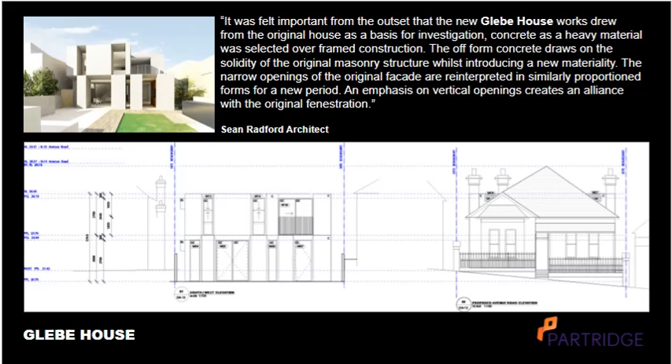The problem was that what he wanted was a checkerboard facade. And when we inquired about exactly what the checkerboard facade was, he wanted a single point of contact between all the concrete elements on the facade. No overlap, single point of contact. So he wanted something that was spectacular and an interesting use of concrete. So the first thing that an engineer does is try to persuade the architect to change his mind.

We all do it. It's worth a go. Needless to say, you sometimes have to go away afterwards and say, look, could we really make this work? Could we give it a go? What could we do?

So these were the images that they presented to us of what the house wanted to look like when it was finished. The architects are very creative in terms of what they produce. Engineers sometimes think that they're unrealistic. I would ask you not to prejudge, but let it run its course, check it out, run through all the options and see whether we can actually develop a system that can make these things work.

So a lot of off-form concrete. The finishes had to be crisp and clean, lots of square corners. So a really crisp finish for a back extension on a small house in Glebe.

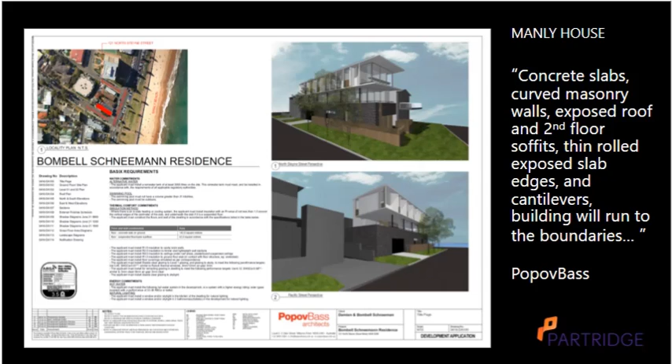Second phase in any design project is engagement. So after you've done your listening, you go away and you think about it.

So sometimes it requires this lateral thinking. What can we do? How can we solve the problem? Rather than just a very simple first principles look.

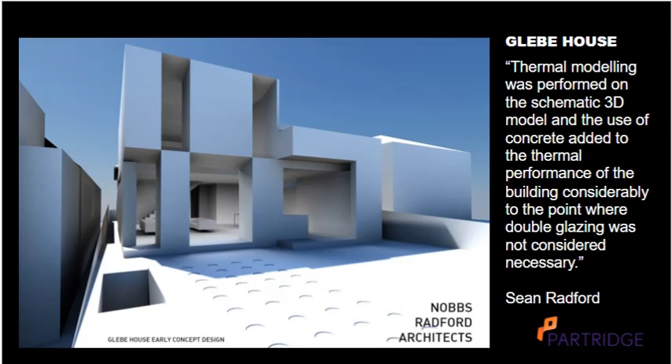One of the other investigations they did with this building was to do a thermal study, and they used the 3D models. And you can see on that, it clearly shows that single point of contact, how crisp they wanted those corners. And they discovered that they didn't need double glazing, which helped them a lot in their detailing and how they fitted their glazing into the concrete.

So, like I said, we went away and we gave them the obvious solutions. We said, why don't we have a nice big thick slab at the first floor? You'll see the edge of it in some cases, you won't in others. They didn't like that. We said, what about if we have a big thick slab at the roof and we hang everything from that? They weren't particularly happy with that either.

And what I need to point out is that behind that facade, for about two-thirds of its length, is a void. So there's not an awful lot of cantilever backspan and stuff that you can do with it.

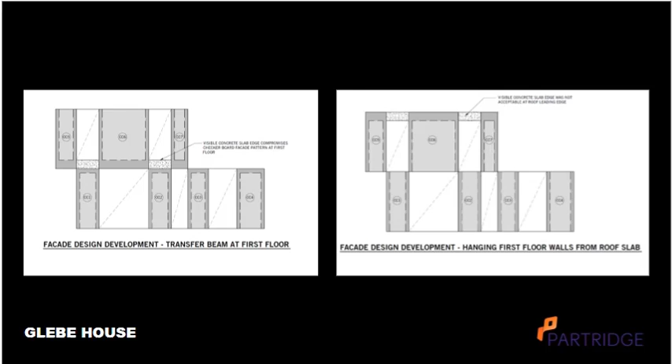So when we started to look at the design of this facade, it's actually a 3D facade because the columns have a certain depth. But visually from the outside, you want to see a 2D image. So the concept here then was the reversal of this. It was to turn a 3D structure into a 2D image.

On the Manly House, this is a bit of a demonstration of this whole engagement thing. This is this first stage of the architect sends you your drawings, you scribble all over them, you send them back. We now use Bluebeam and some other sophisticated electronic ways of doing it, but the process is still the same. It's a two-way conversation.

Sometimes you can get the builder involved early, and that is what often produces the best results. You're getting a good understanding of what they can do, what formwork they need, what section sizes are best. And so this continues for a number of weeks.

I've shown you the polite comments ones. Sometimes you get the triple question marks and the what the, and are you joking, right? I've kept them off this one.

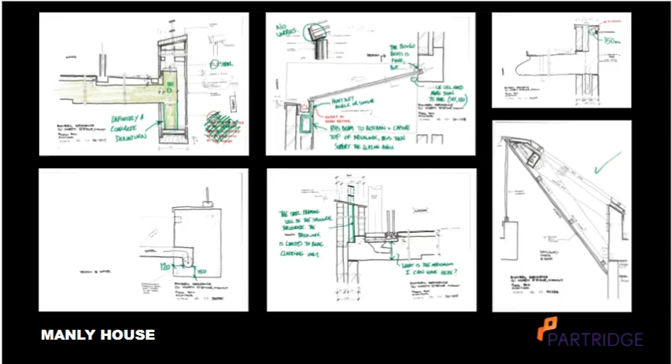So you can see they were quite demanding in terms of the edge treatments. In a couple of cases, we did have some sloping glazing that we had to incorporate into the concrete. We have to run our downpipes, our drainage through them. You have to look at the falls. How is water going to get away? How do we prevent water from getting in? And how do we give that lovely, crisp, clean look along the edges of the structure?

So then comes the thinking stage. So sometimes you've got to step back. And a lot of what's involved in these processes is the spark of that interaction with other creative people. So engineering is a creative pursuit. You're using your skills and you're using your experience with someone else who has very little understanding of the mechanics of the situation. And between you as a group, and again, if you can get the builder involved, you evolve a solution that solves for everyone. A bit of compromise on all sides, but it's about getting in there and releasing some of those prejudices that sometimes we're accused of.

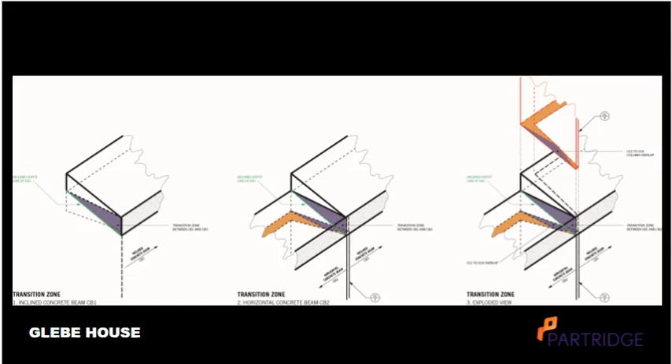So this is what we came up with. So we used the depth of the facade to actually create a sloping soffit on the sections which were visible at the front. I don't have a pointer here to show, but if you have a look at that very first slide, you'll see that the facade is in different beams that intersect with one another. And the exposed ones at the front have a sloping soffit that goes downwards, and the ones that are not exposed at the front have a sloping top that goes upwards. And between the two, we get this triangular zone of intersection. And through that, we're able to run enough reinforcement that ties the whole of the facade together.

The other problem was that the column sections, the C sections that run across the front, you can see them here, they don't align. So the back legs are splayed, and they don't cross over by very much, except for this beautiful shape that we have here. So to get our vertical continuity in our columns, we have to rely on running our compression through that zone and running our steel through that zone. So you can start to see that sometimes it's a difficult problem, and you can come up with a solution, but then you have to build it.

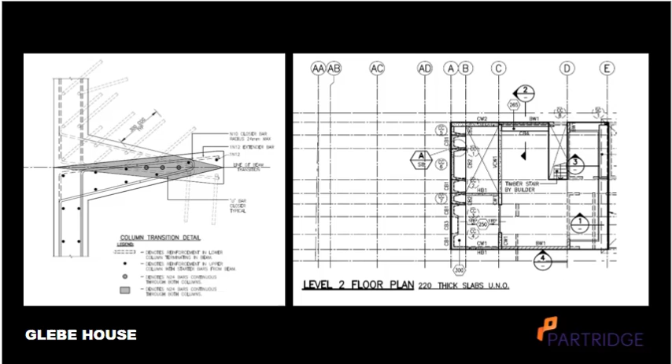So we looked at precast, because again, it was all about the finish. How can we get those nice clean finishes? You precast. You put everything in a precast workshop, it's all done inside. You can do some of the elements on the flat, so you can get a much better quality finish. But when you see the amount of components and how different they are and what's involved, bearing in mind that this is at the back of a terrace house in Glebe, you start to think this is not really physically feasible. But you still have to go through that, because it starts to inform that whole discussion going forward.

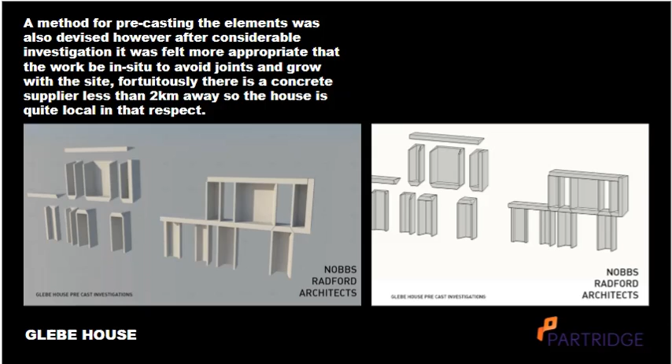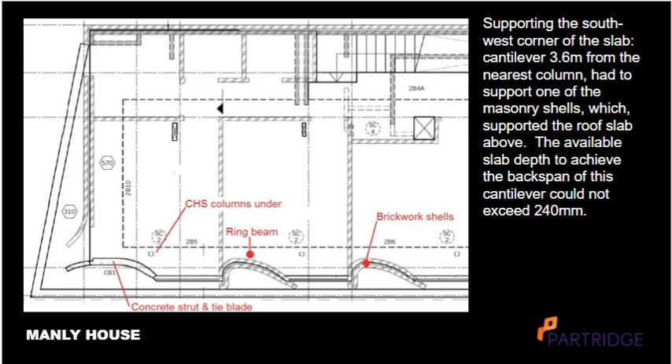With the property at Manly, we had a different problem. The architect wanted to have a skirt the whole way around the building of an exposed slab soffit with the cantilever up to 3.6 meters. He also wanted heavy masonry curved elements on the facade on the upper floor. So we all know that if you put heavy brittle masonry on a 3.6 meter cantilever, you need to have a fairly substantial concrete slab. Except we weren't allowed to have a substantial concrete slab. And that dotted zone in the back there, that's where he wanted a recess, to run all these services and lights through there. And he said, maybe 200, 240 thick I'll give you, right?

So the solution in the end was to put a concrete wall at the very end of that cantilever and to use a push-pull and a diagonal so that we turn the wall into a hanging column, which transfers the load back onto that column and turns the cantilever from 3.6 meters into something around about 1 meter. And then we put a torsion beam the whole way around that void, and that took those loads back into those columns and rectified everything. So we were able to give him his recessed ceiling zone in the middle, his 3.6 meter cantilever, and his nice rolled edge around the outside.

So that's the detail of the column. And of course, as with everything else with these, that column with the brick skin on the outside had to match the thickness of the cavity brick everywhere else. So again, we're restricted with the thickness of the column that we could actually use.

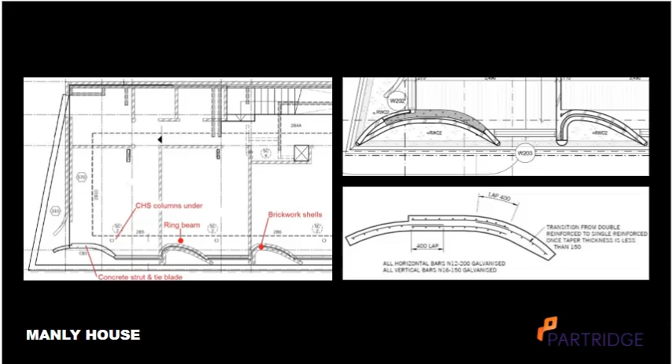Okay, so the engineer's done his job, the architect's done his job. We've got to get it built. I like this comment, because in a lot of cases you have the best drawings in the world and you go to site and things change, conditions change. You've got to react to what's there. So you need to have a good builder. So Yunken had superb formworkers. They reckoned it was one of the hardest formwork projects they ever did.

So to get that overlap, the reversal of the formwork, those very small transition zones, and you look at that reinforcement in those photographs, beautiful. I mean, it's not often that you go to site and you see reinforcement so beautiful. That is more what you would expect to see in a precast yard where the conditions are benign and you have beautiful steel forms and everything stable. This has been done in a small project, in a domestic project. Absolutely beautiful work.

They managed to do this in 12 months. They managed to do it on budget. So again, it's this having the right skill set, having people with a can-do attitude. So you need to have a visionary architect who comes up with a really brave scheme. You've got to have engineers that want to say, yeah, we're going to give this a go. And then you want to have a team of builders, formworkers, concreters, who have that real skill and passion and take that and drive it.

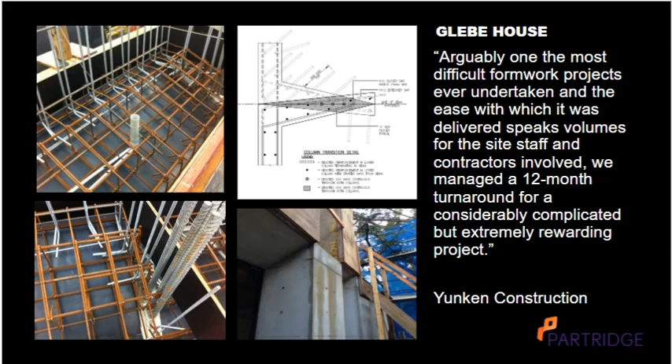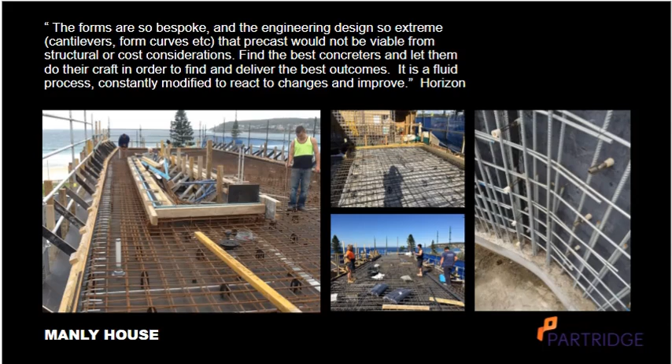So you can see those beautiful curved forms. They made a prototype. If you want to get concrete uniform, you want to get color, you want to get consistency, you've got to do a prototype. You've got to make sure that the color of the concrete is as close for each of your pours. You do that by getting your concrete from the same plant with the same mix. You make one or two samples. And then you do the crucial thing, is you get the architect to agree to it.

One of the advantages of having a panel that you can say, look, that's what you agreed to, is that when this assessment happens afterwards, as it always does, and someone says, oh, this isn't really what I wanted, you can point out and say it's exactly like the sample panel. Always recommend doing sample panels.